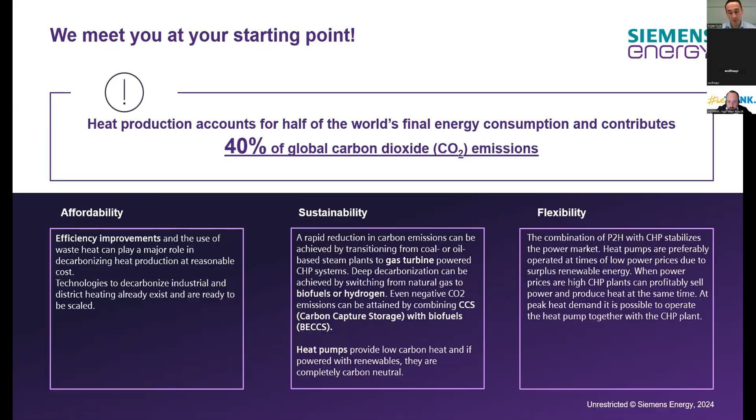And now, speaking on behalf of Siemens Energy, we have Siemens Energy as one of the significant players in this arena, with a lot of knowledge and experience to help you shape up your projects and guide you on the path to full decarbonization. I like to bring a real life example to make this easier to understand for everybody.

For example, if you're planning a trip, you want to travel from Paris to London. Of course, you can take a plane and fly there. You can board a train — there is a train connection between Paris and London. You can take a car and be transported through the tunnel below La Manche and then drive again. In theory, you can also walk and swim.

But I think you can all agree that some ways are more affordable than others, some ways are faster than others, and some ways are better than others.

So this brings me to the next part of the presentation, where I will try to put the spotlight on a couple of selected technologies which are applicable for heat production systems.

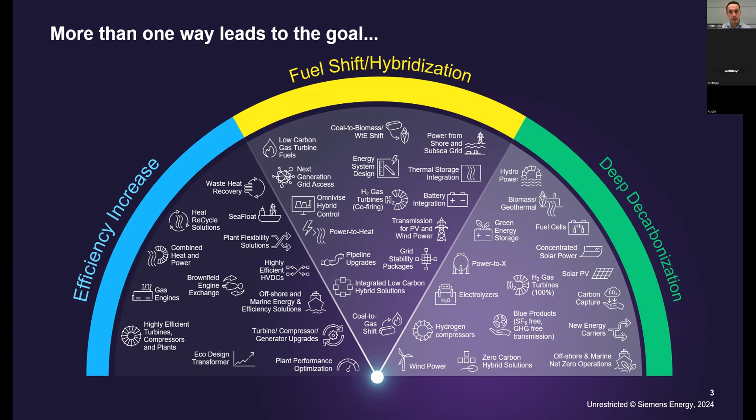Possibly this might give you inspiration for your future endeavors within your companies or organizations. And if you recognize something, if you have a project in the pipeline, feel free to contact me or my colleagues from Siemens Energy, and we will try to find an applicable solution for your needs, either by selecting a product from our portfolio or guiding you with some of our partner companies.

I would like to start this overview with simpler adaptations which can be done by showing that you do not have to blow things up and do some large scale projects to reach this decarbonization. Every step counts. Later on, I will switch to some technologies which may require a bit more planning, a bit more effort.

For example, if you have an older gas turbine which is not anymore state of the art, you can exchange it. If you have a steam turbine, you can exchange the blades, or exchange the whole turbine, making it more efficient. By improving the efficiency of a system, you will optimize your fuel consumption. You will either produce more energy for the same fuel consumption, or the same amount of energy using lower fuel.

Basically, what I'm trying to say is you do not have to scrap all of the existing systems. There is always a way to improve it with fairly reasonable investments, and in that way improve your CO2 footprint. So here we are talking about partial decarbonization, where by improving certain steps of your process, you can start your path towards decarbonization.

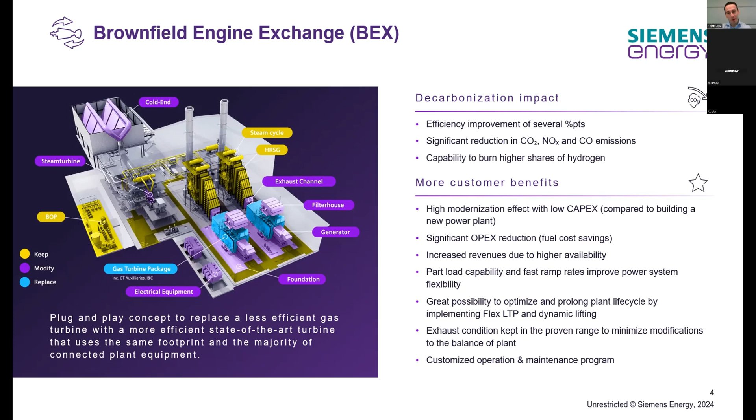Very important topic, especially relevant for our region of Central and Southeast Europe. As I have mentioned before, we have several countries with a significant role of coal in the energy mix. Just to put some spotlight on coal, if you compare coal and gas as fuels, and substitute your coal system with a gas turbine running natural gas, you can already reduce your CO2 footprint by 50%.

Meaning if you connect a gas turbine to a hot water boiler or heat recovery steam generator, you already drop significantly, by 50%, your CO2 footprint.

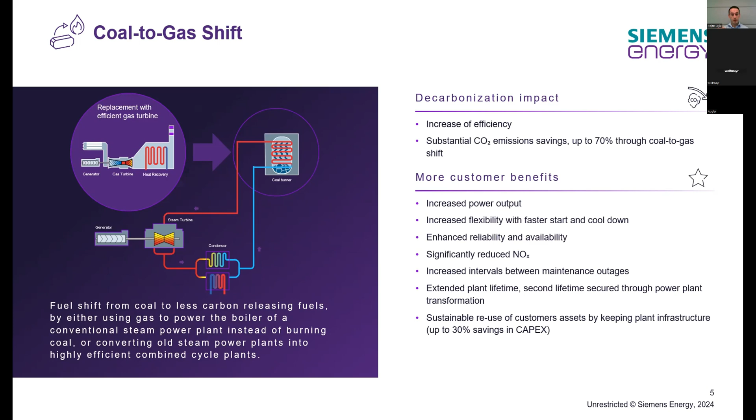Very related to the topic of coal to gas shift, you can furtherly make your system more efficient. If you have an operating gas turbine which has a very high temperature of exhaust gases, you can use this high temperature to convert water into steam within a heat recovery steam generator, run the steam turbine, basically creating a combined cycle out of which you can take hot water or industrial steam for your processes.

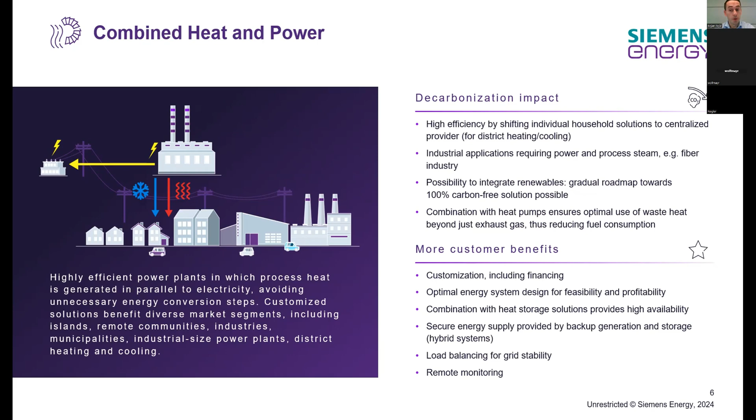I think this is known to most of you, but with this you can reduce the CO2 footprint by 70%. So just by switching technology or making the fuel shift from coal to gas, you can reduce your CO2 impact by two-thirds or even more than this.

Of course, two-thirds are not enough. Our final target is reaching full decarbonization, going to net zero. I think many of you have been dealing with the topic of hydrogen, or at least heard about hydrogen as an alternative, as the future, as an upcoming technology, which can then in the mid or long term replace natural gas. This is all correct.

I think hydrogen is a topic where we would probably need a separate session to discuss it. But yes, hydrogen is a fuel. It's a gas, a flammable gas, which can be used within gas turbines. Our gas turbines are already capable of burning hydrogen. You can blend hydrogen with natural gas at various levels, and in that way reduce your CO2 footprint furtherly. Or if you're burning 100% hydrogen, you can completely eliminate CO2 emissions.

We have various gas turbine models. Some of them, depending on the type, are able to burn between 30 and 75% hydrogen in the mix. But we also have a clear commitment that by the end of this decade, all of our gas turbine models will be ready and capable of burning 100% hydrogen. Also, each gas turbine which we sell today will be able to be adapted in the future on site to burn 100% hydrogen.

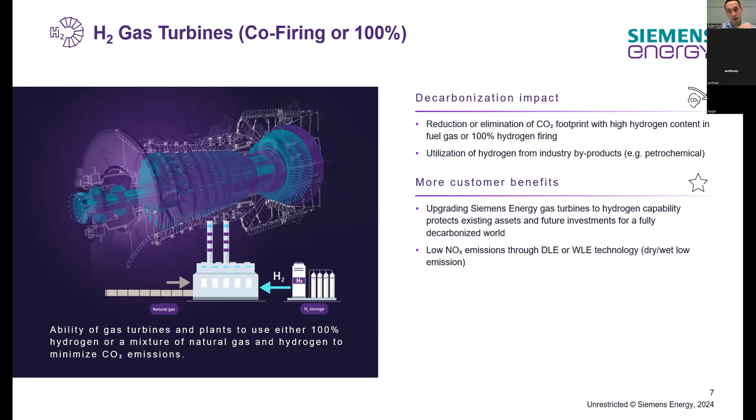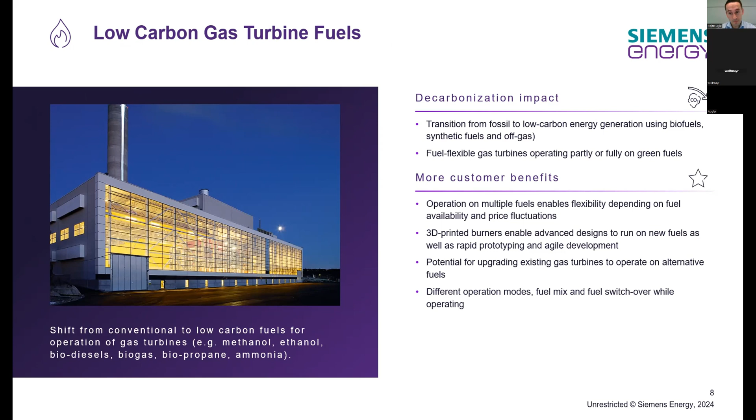Hydrogen has gotten quite a lot of attention in the last couple of years. You can see articles and conferences about it basically everywhere, already today or in the future. Low carbon gas fuels do get attention, but maybe not as much as hydrogen has gotten. Those fuels include either synthetic fuels, such as e-methane, e-methanol, and so on.

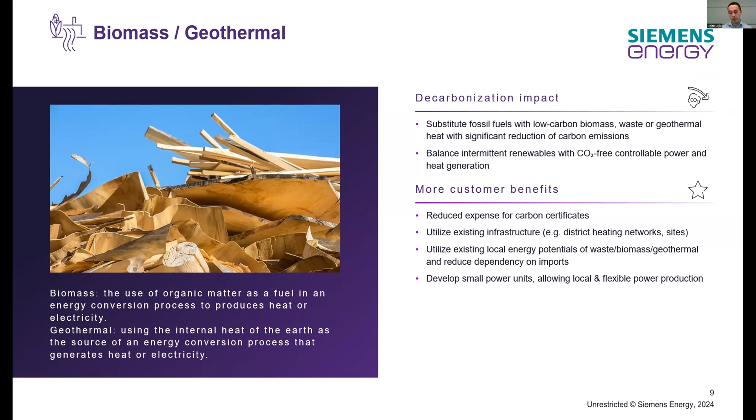Geothermal sources can either be directly extracted into the system, so you can directly use hot water and pump it, for example, in a district heating system, or you can combine it with a heat pump to utilize it for heating of systems in winter, and vice versa, cooling of buildings in summertime.

Those couple of technologies I have mentioned all relied on some kind of fuel, be it coal, natural gas, synthetic fuels, biomass, whatever. But there is also a strong tendency nowadays to electrify processes, to get away from this fuel burning.

So we talk about so-called power to heat processes. One of the main, most known examples are heat pumps, where with electrical input you can generate 2, 3, or more times higher thermal output. Here we do not even talk about efficiency of the process anymore, because obviously we can't have more than 100% efficiency. So we talk about coefficient of performance, which can be 2, 3, or more, meaning we get more thermal energy than what we put into the system electrically.

This is also something covered by Siemens Energy, so we do have heat pumps in our portfolio. Those are systems capable, especially for district heating systems, of temperatures until 100, 120, maybe even 150 degrees. If you need slightly higher temperatures, like 250, 270 degrees for industrial processes, you can add a compressor and reach higher temperatures.

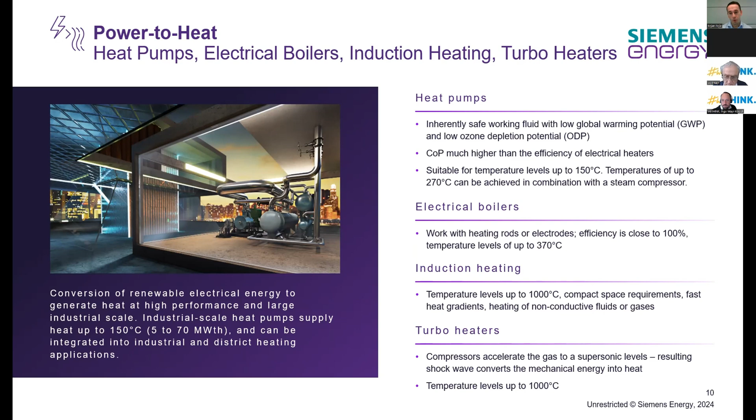So what I would like to offer you as a kind of wrap up is a so-called cheat sheet. I try to take this couple of selected processes to show which technology may be suitable for your application, depending on the temperature levels needed.

So if we talk about lower temperature levels, of 50, 100, 150 degrees, this can be easily achievable with a heat pump. But also coming back to combined cycle power plants or cogeneration power plants, this can also be achieved by extracting steam or hot water from the steam turbine part or directly from the boiler.

Coming back to my last slide, we have some chemical industry or other industries where temperatures of 300 to 400 degrees are necessary. There we would probably go for electrical boilers. And then, some petrochemical processes, glass, cement manufacturing, steel making would require planning of induction heating and turbo heaters.

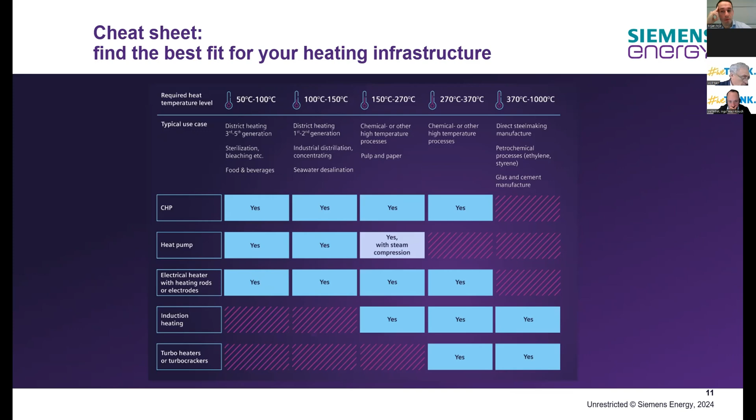And maybe what is not here on the slide, but it was a good note from one of the previous presentations this morning, is also the utilization of carbon capturing. So maybe this is not directly a topic for today, but you can also plan further. If you have a CO2 intensive process, you can also add a carbon capturing system. This may require temperature levels where possibly more investments and more planning is needed.

I tried to scratch the surface of selected technologies which are available on the market. But of course, if you have any project in the pipeline, or any projects in planning, feel free to reach out. You can make a screenshot of the contact data and feel free to get back to me. I will try to support or at least try to connect you with our experts within Siemens Energy.